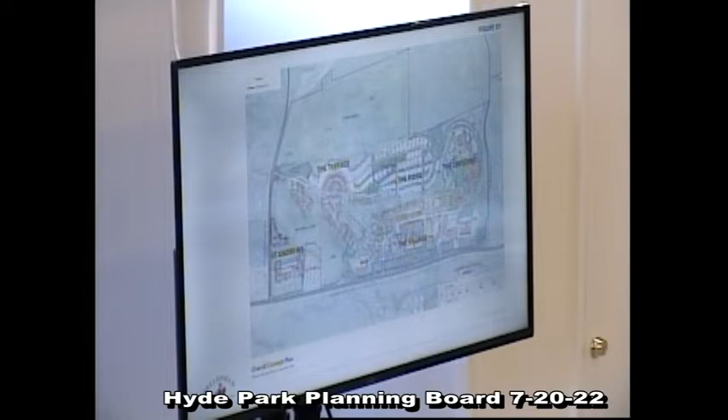So Chris, go to the next one. I wanted to remind the board, again, this is the overall concept plan, which was approved last December. We're all familiar with that, worked very hard on getting that worked out with our team of consultants. This was prepared by Hart Howerton. Of course, the village is where our phase is, that's where we're focused.

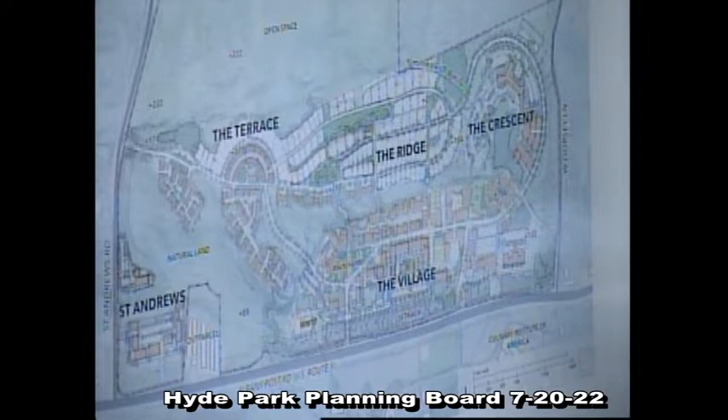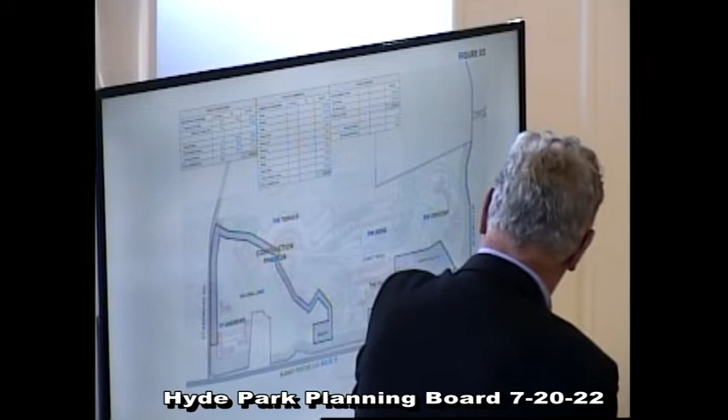All right, this is the phase. This was phase 2 that we presented last December, but the big picture here is the sewer going up, which is what we're doing, and this comes out to here, down and around, so pretty similar. The idea is that we are developing Main Street - we're going for it, so we're going to take it from here all the way through, come up and then down, link it over here, and then of course with the main entrance going here.

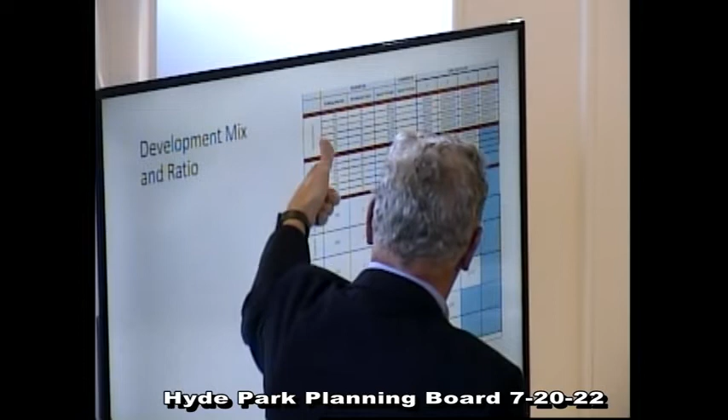So what I wanted to show is this development mix ratio, which we've submitted, it's part of the package. This is a pretty clean way of showing the way we identified the uses and the buildings were by number. So we have 1 through 1800, and then we identified whether they're residential or commercial and assigned the units, the square footage, so we can take that all the way down. 18 buildings, 344 units, and then the square footage for the residential, commercial. We're adding in the hotel into this phase, the 106, because it's by itself, so we rolled that in. And then we can compute the ratio, which is at 62.8 and 37.2 residential.

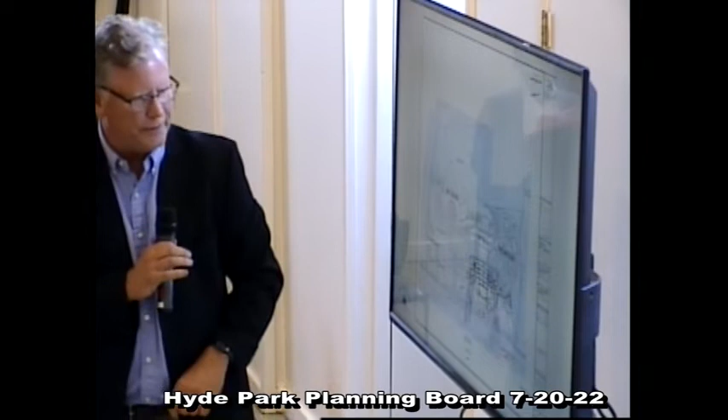So what this does is show phase 2 as we propose it over the concept master plan. The next one shows it zoomed in, so you can see that this is a civil drawing in CAD, tied to radiuses and grades over the concept plan that was done freehand. So this is in CAD, but it's pretty close to where we had designed Main Street to be.

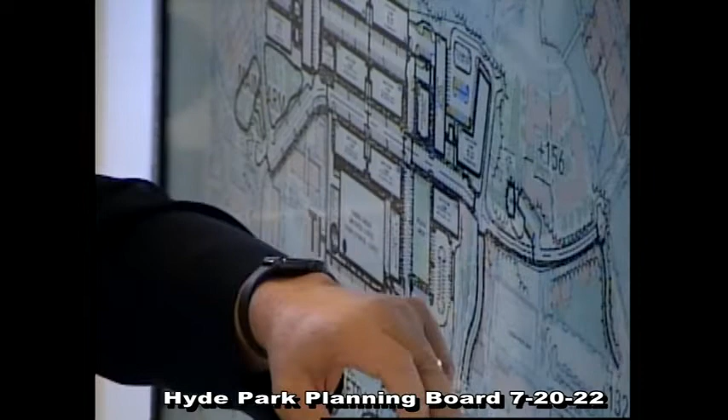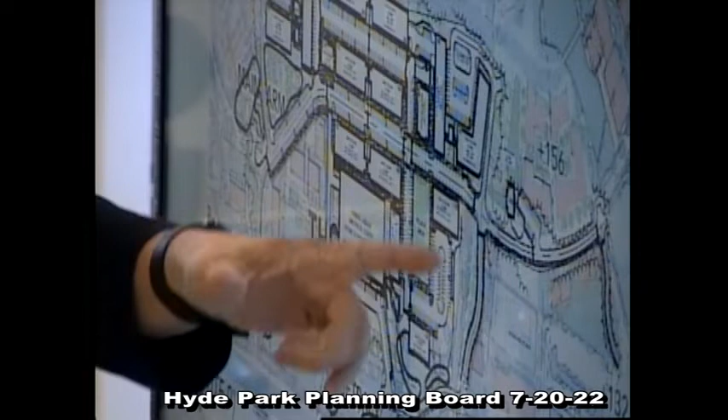It is pretty close. Where you see roads move around, that's mainly because of grading reasons. For example, this here is moved that way because we do not want to disturb the wetlands, so we gave it a buffer, sloped up, which defined where the road edge was.

So for Main Street buildings, there is a difference in this road design compared to what was originally approved on the ODA map, and I do show that in a couple of slides. The reason why, here we kept the parallel parking, here we went angled, and angled here. We needed to do that because we needed to get to the parking demand.

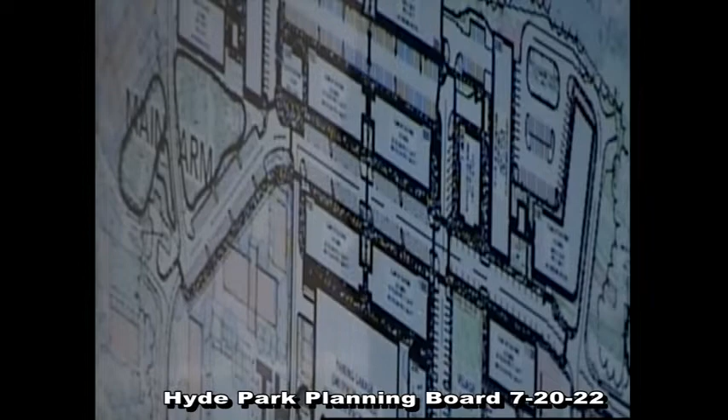Part of your set includes the parking allocation, and we color-coded everything so you could see that we're not just fluffing this up, we really nailed it down. The parking requirement is based on spaces per unit, not only for residential at 1.5, but on the commercial side we were using 5 per 1,000. Whatever we couldn't fit in this area ended up in the parking garage.

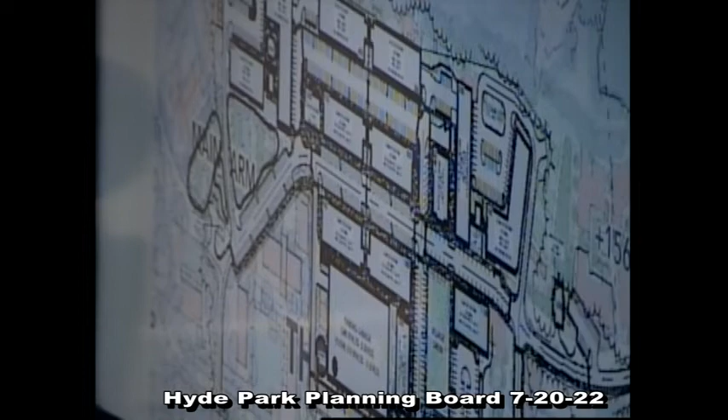You also added a little bit of parking on the outside, ground parking, surface parking, where you changed the road that would go up to the parking garage as well. Correct. So this road follows that utility corridor. It goes over those wetlands, and you're right, when you look at the ODA, the road's not there. So this was an add.

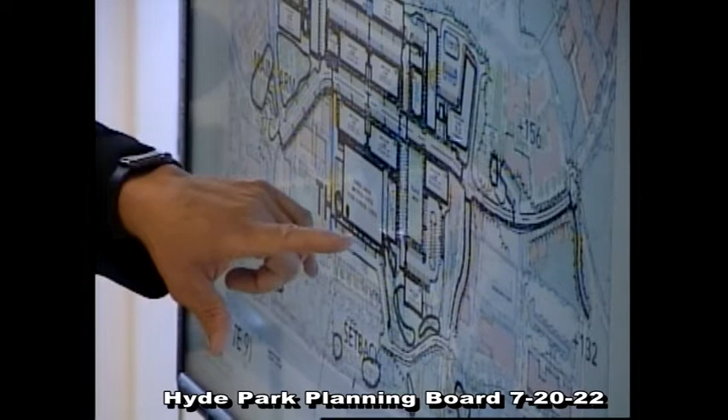And I did go back and look at the concept plan. We tried to leave a 20-foot buffer between the garage, so we're going to plant that pretty heavily. Larry, what are those circles in the setback?

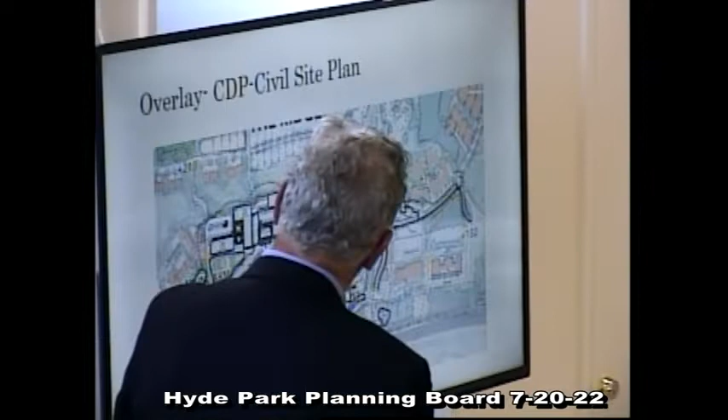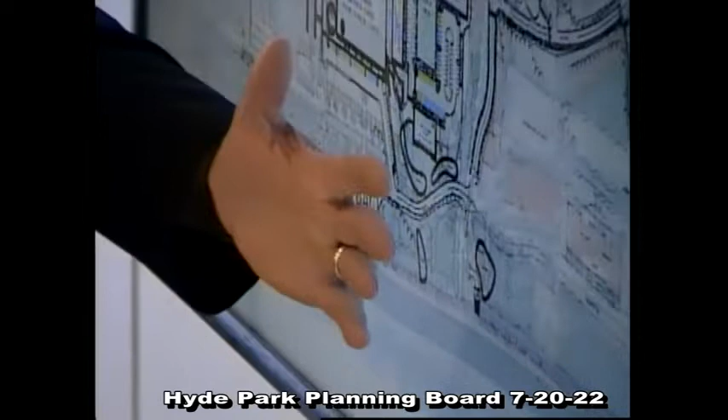These are identifying areas for stormwater management. It's not worked out yet, but it's a natural low depression. We went ahead with Annie and marked all what we felt were significant trees along that entire setback, so we'll work with them accordingly. But yeah, that's what these are.

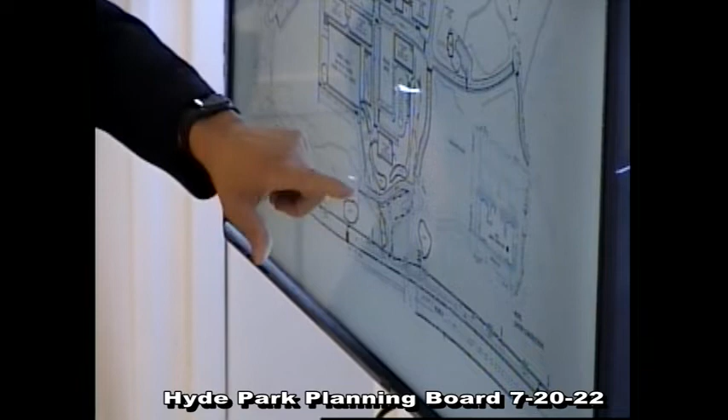This is the phase 2 by itself without any background. So you can see the road here coming up to the parking deck. What's not here is this connection coming down and looping. Obviously, you can't do it because of the wetland there.

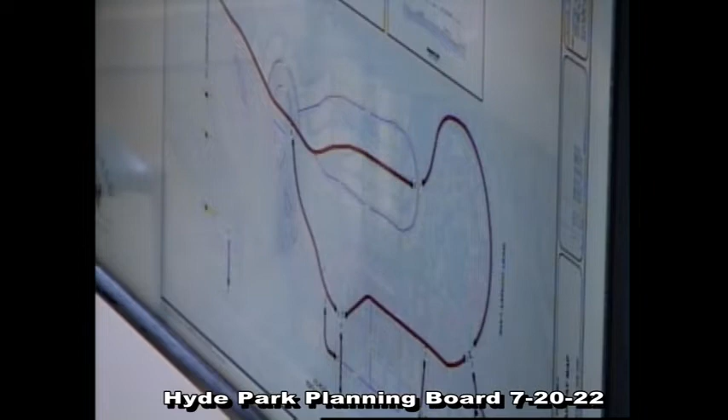Here's the ODA overall map, and it does not show that connection, so that is a difference. It also does, and rightfully Tad brought it up, this is number 6. So when you look at number 6, you see the profile of the road, and we'll respond on how it's different.

Mainly, it's different for 2 reasons. One, we went to angle parking, so we need a wider width. The other reason is the sidewalk along Main Street has to be a minimum of 5 feet. We made it 15. 15 feet is really a good width for retail tenants to have before you get to parking.

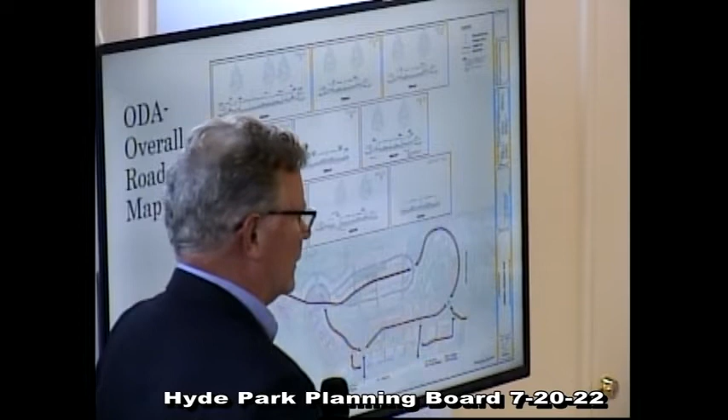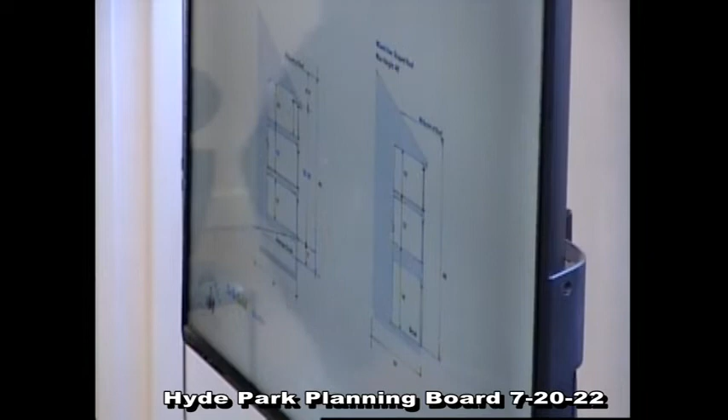Building heights, we are calculating now at every 10 feet, so that's quite a chore. We are going through that. Several of them are not going to meet this 46 feet. All the Main Street building heights are met or below 48 feet.

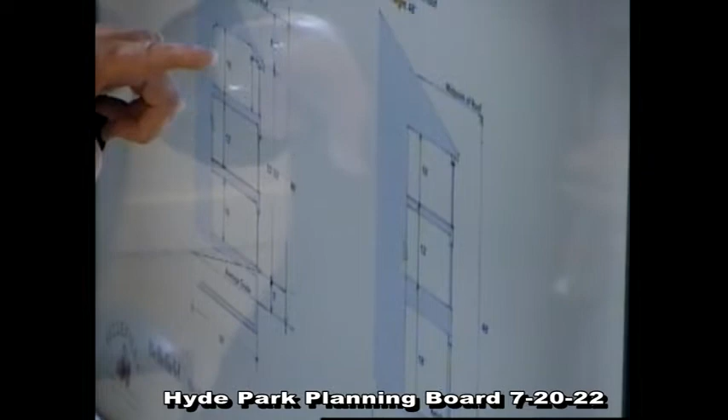But I was sitting down one day looking at this, and we were flying through this back in December, and I said wait a minute, these numbers don't add up to 46. Depending on, like this 10 feet here, what happened to this 2 feet here? This is a weird configuration. This really should go across here, that line should come up. So it's really a 48 or 49 foot number. But even with that, we're still going to be a little bit above that.

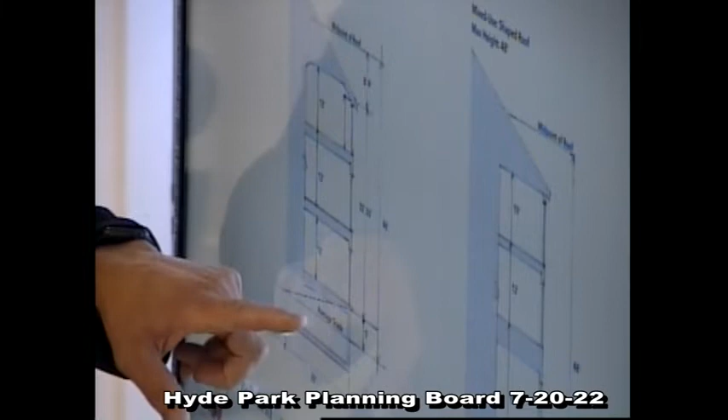What does not change, and I think there was some confusion, are the number of stories. I think I said 4 on there, but that first floor includes a garage, so it's a garage plus 3.

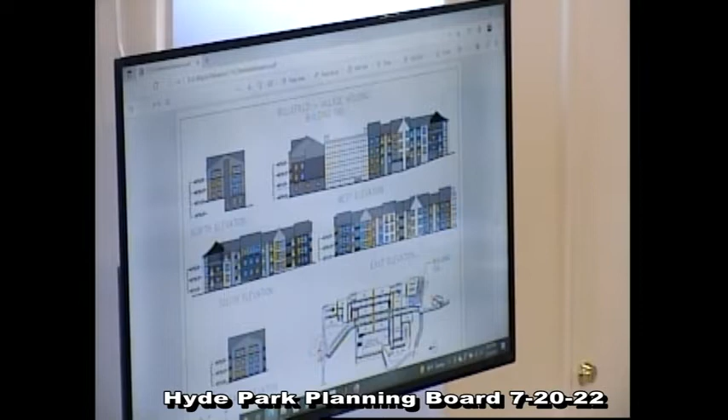So this is building 100, and what we did, you can key it in, you can see it here. As we go through, the buildings will be highlighted. This is the first building. It's all residential. It actually has a bend to it, so it goes around the road and keeps the integrity of the corner. You can see the architecture is very traditional in form, with massing, gable ends, and varied types of siding.

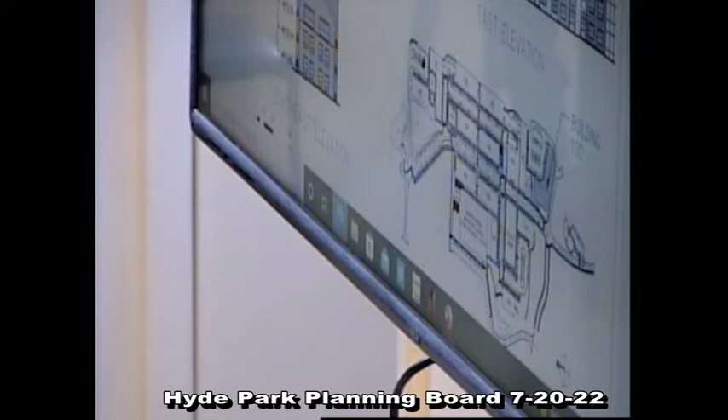We'll have, you can see here, this is the west elevation. This piece here is more modern, but that's a connector between 100 here and 200 there. So you'll see we've had a play with that, so you get a modern piece that keeps check with the traditional architecture itself.

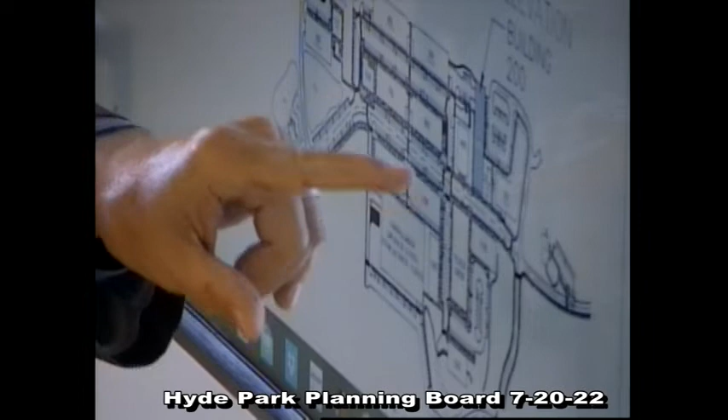200 is the sister building to 100, on the other side of the connector. This south elevation you can see is along this edge here. This is like a sliver building, sort of. You'll see the edge, which is here, and that's the west elevation. So 100 is over here, the connector is between, and this is the 200 building. This also has underground parking.

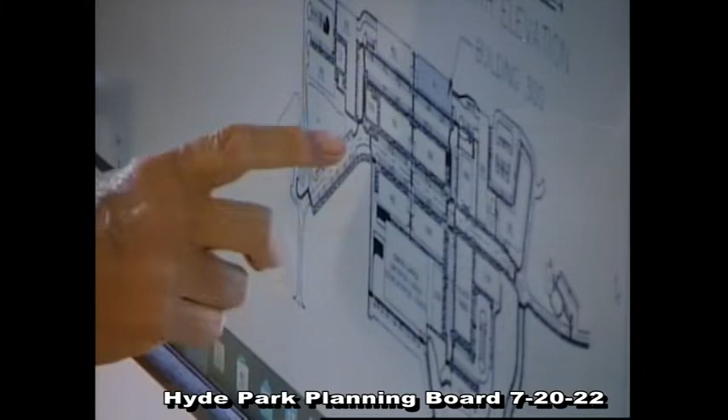So the 300 and 400 buildings, to orient everyone, these buildings 700, 800, 1000, and 900, this is Main Street. Buildings 3 and 4 are behind the Main Street buildings. These are residential buildings in character and totality. Again, you can see the flow of the architecture keeps on through. It has a gabled end, some really nice glass elements, a lot of glass.

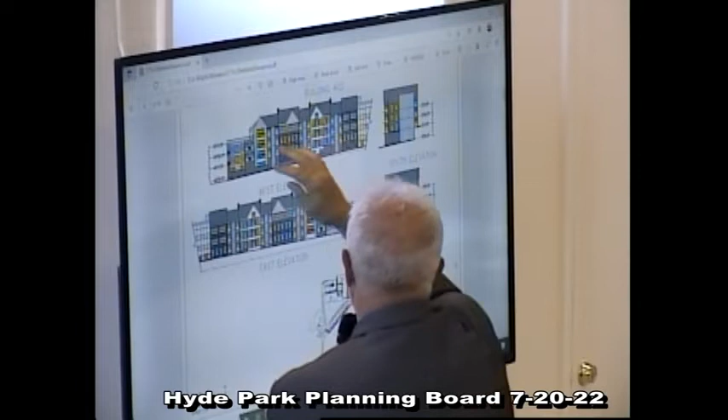As you see, the Main Street buildings will come up after. 400, this is the sister building to 300. You can see that 300 would be over here, this is 400, the west elevation up here, east elevation. This is more into the hill, this is more towards the river side, Route 9.

So this is 500, the next buildings will be 500 and 600. They are again residential in height, three stories. Again you can see the complementary architecture as you go through. The fabric of the architecture is varied on purpose. We didn't want something homogeneous, which wouldn't look good. We wanted something more interesting and organic, so the fabric is woven through.

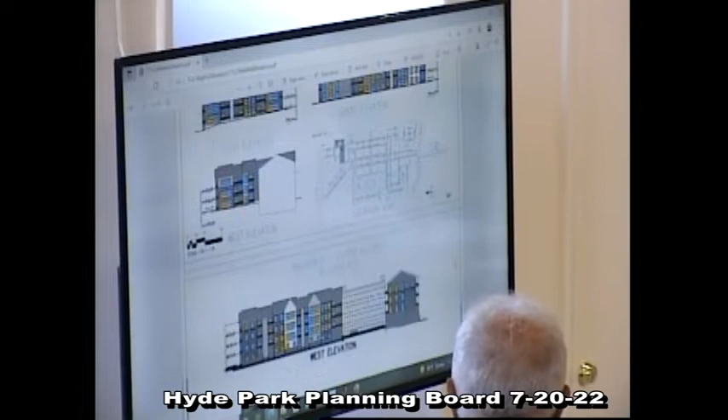Again, this is 600, the sister building to 500. Again, you can see how it all takes shape and comes together very well.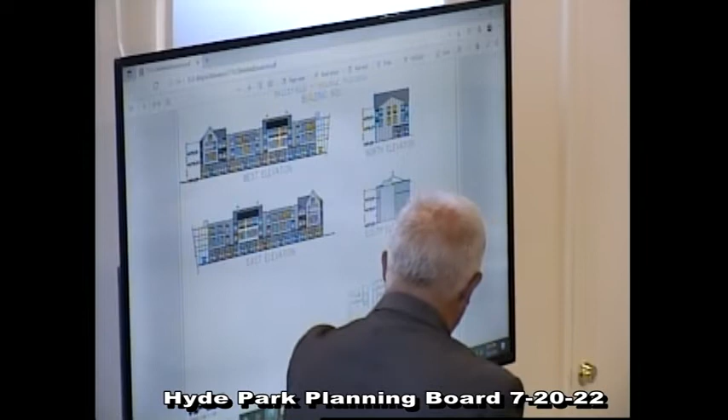So we go to 900 and 1,000, and you can see as you go along Main Street here, residential above the commercial. In this case, this would be the west side of the building. We're also going to have commercial, so you can walk through from Main Street, and then it goes to the parking garage itself. Building 1,000, same thing - residential over commercial, varied architecture, varied materials, very nice in context.

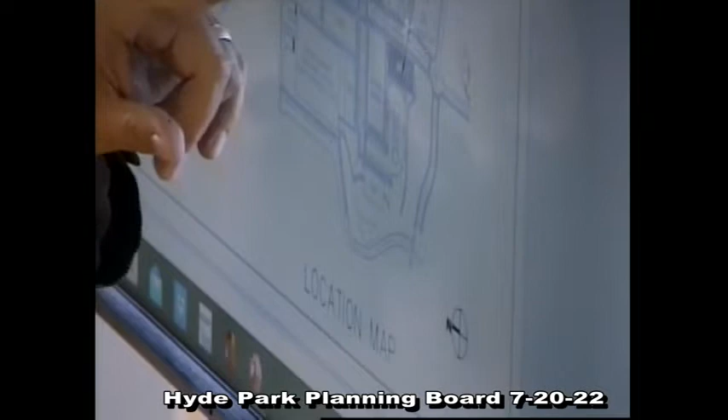Building 1100, a standalone building. So you have a village green here that will be shown in renderings as we go along. This is on the south side of the Main Street buildings, a smaller building, but all residential in form, with commercial on the first floor.

This is 1,200, again a standalone, smaller building behind, toward the riverside of the Main Street buildings. This is the City Winery building, and it's probably one of the closest buildings to Route 9 itself. It slopes down - it'll actually be a great place to hang out. City Winery is a known entity, a great tenant, great use for the building, and it starts to pick up some of the stonework along the western elevation, tying into the Hyde Park ideals. It has a barn-more feeling to it.

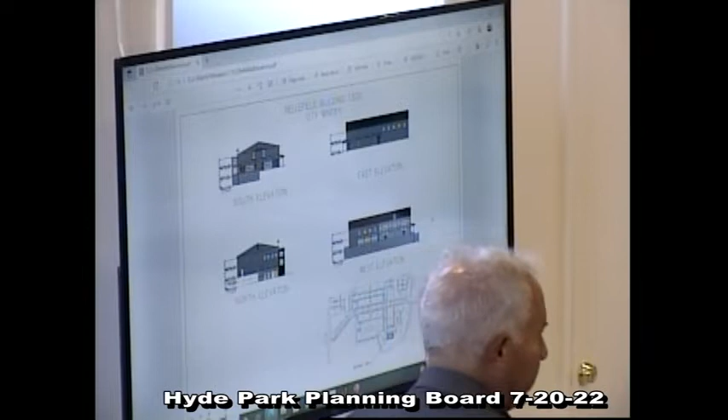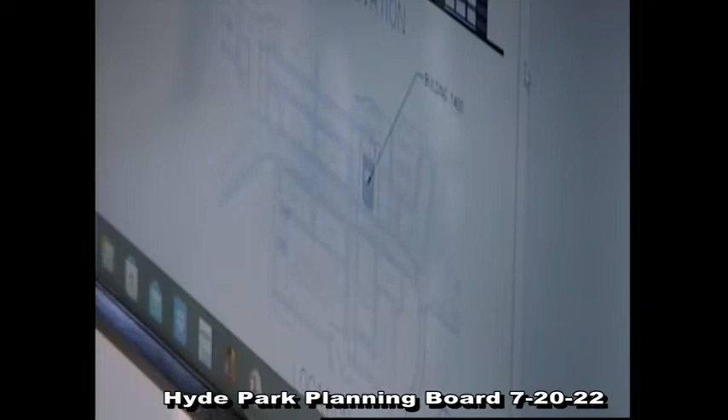This is an interesting building, right here. It'll have a rooftop pool overlooking the green, going down over this. It's really the focal point in terms of recreational operations for the site, from the logistics of the residential piece. This is the west elevation, so this will be the elevation along Main Street itself. That pool - you'll be able to look out over the green and down across the Hudson Valley. So it'll be a really great place to be.

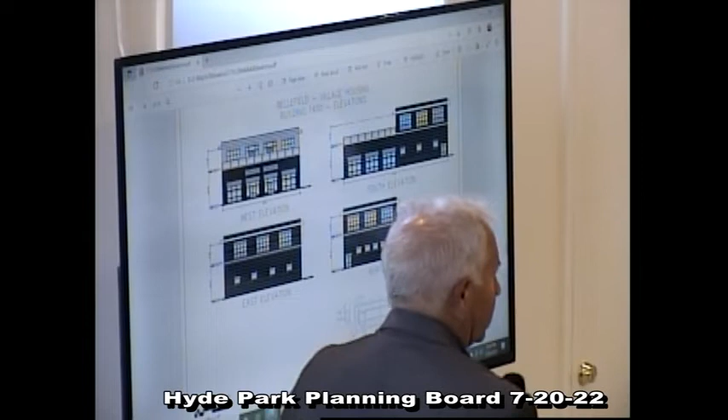You don't show the pool on the elevation of the building? Yeah, it's here - that's a glass wall. It's outside, but it's behind the glass wall. The glass wall is about 42 inches high, and then it's behind the glass wall, so you can't actually see the pool because it's within this - where it says signage, it's in here.

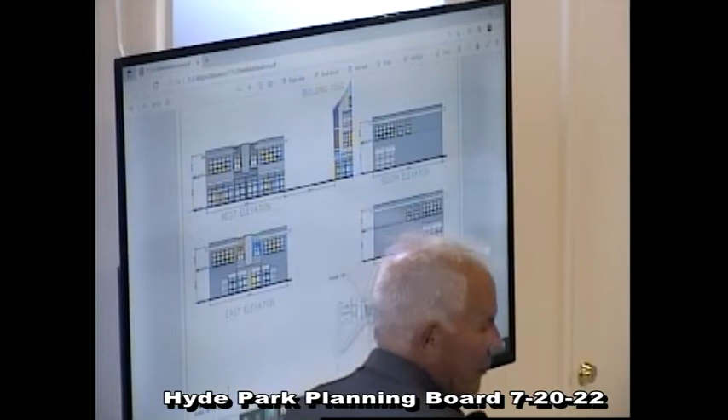So that building, the way it's shown, almost looks like a theater entrance or something - is there like a marquee on it? This one is commercial, so that's just a decorative element, not a marquee. Okay, and again, that's the 1500 building, which is on the northern side of Main Street.

This is the Inspiration Building. It's right here on the site plan, and this is where Tom Mulroy is going to be, along with Larry Boudreau, overseeing the project. It's right by the water tower, and it'll be connected with the terrace.

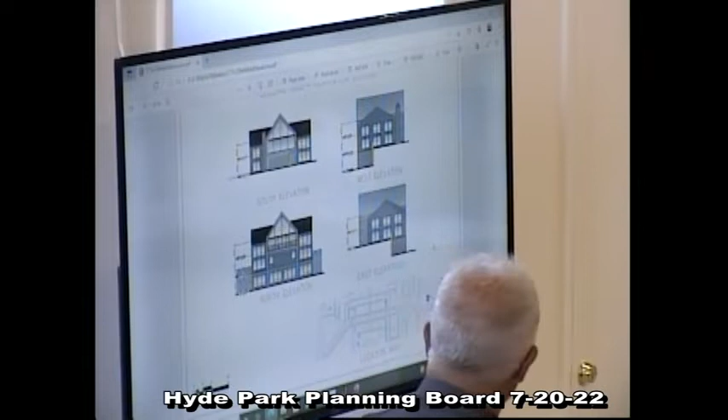This building is 1800, right down towards Route 9. The idea is to make this like a lot of glass. It's really a folly in terms of a building, a cool building to be there, but really the sake of it is to have an entrance point and a focal point for the whole project as you come up the main drive. It has a lot of glass and really cool elements in it, the tractor and... this is the sign barn.

This looks different than what you submitted as well. This has changed, and it's labeled as having a loft. It's a two-story building, and it's shown as storage on the chart that Larry referred to earlier, page 4. So does it have an actual use and a function?

Is it a sign or is it a storage barn? You have it labeled under use as storage, is what I'm asking. Well, the storage was for the tractor and the truck. In other words, will people be able to walk in and out of it? That's all I'm asking. Yeah, I mean, yes.

They're building up here, that's a 1700 building, and that is a real maintenance storage building. That's why I like the barn itself.

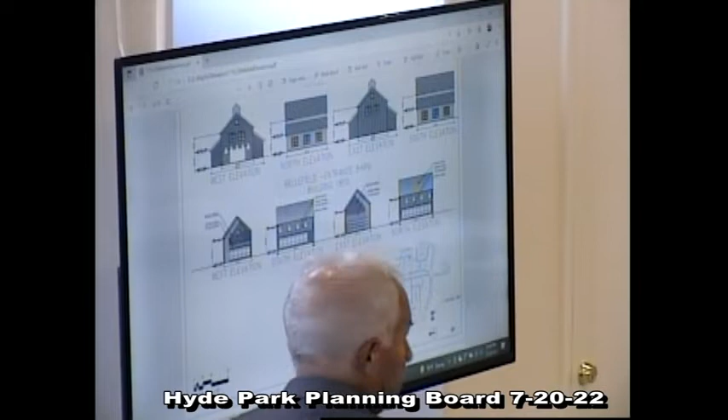So if the bottom one is glass, where's the sign going? That's what you would see coming up the drive itself. So the top one is called the farm barn? Correct. In your listings, you have a farm barn and a sign barn? Correct, the top one is the farm barn. Correct.

So essentially, the garage right now is 2 levels, for the most part one level. It actually has a low elevation. It has some green wall on it, as well as some wood panel, so it's supposed to really start to blend in with the landscape.

I should add that that does not comport with your design guidelines as adopted. The design guidelines say parking structures are supposed to be screened to reduce their visual presence. Appropriate ways to screen parking structures include ornamental building treatments, ornamental roof lines, gradually sloping earth berms, green vegetative facades and roofs, and that's just open, so you're going to see parking from there. So this does not comport with what's inside the code. Also, at parking structure roofs, heat island effects should be mitigated through the use of reflective paint, canopy structures, green roof, or solar PV arrays to block sunlight absorption.

That doesn't appear to be done here, so you're going to have to tell us what the mitigative measures are that you're doing to avoid that, because this is all proposed by your team. Yeah, so we'll take a look at it and come into more conformance. I think the idea with the green wall starts to do what the guidelines talk about. Green walls, that's already required in here as well. But you have to do something to the top, I think, to meet with this.

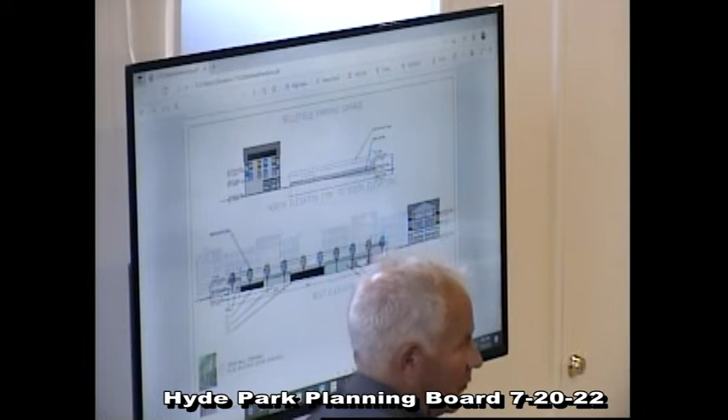I know this isn't for now, but what do you do with the parking in the meantime? Do you have to relocate everyone temporarily? It has to be managed, absolutely, but we did not want to give up on it, so we're meeting with them tomorrow about the logistics of it. Once all the businesses are operating, 200 places need to get somewhere else.

So you could do like half the garage closed at one time, and do the other half. Interesting.

But again, with the garage, it is a work in progress. We're meeting with them tomorrow to learn more about costs and how to make this thing happen.

What's interesting about this is that the third deck is below the finished floor of the adjoining buildings, so it all works. That's the proposed third deck.

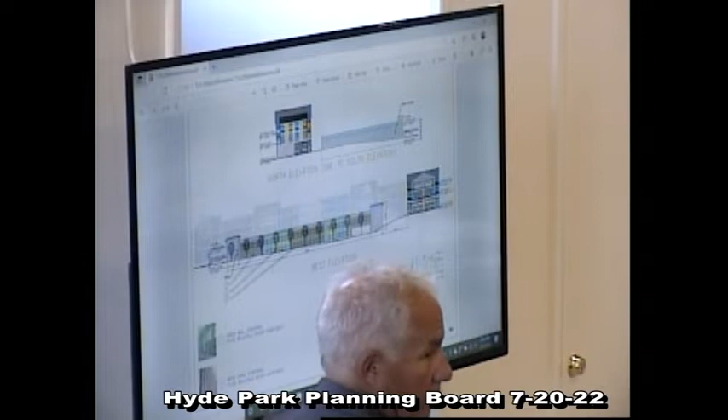So I think that's it. Chris, can you flip up the renderings? Again, the renderings are a work in progress, so you'll get the general feel for what's going on.

This is what we have. This is the corner building, as you remember. This is the first building we spoke about, with the enclosure between the two buildings and this clubhouse.

This actually has to be updated, as Ann talked about. That's why we couldn't figure out where it was. The pool's right here.

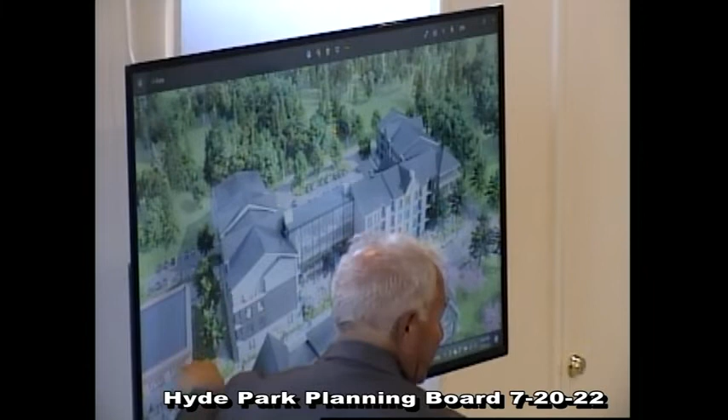I'm doing a lot of hand waving. Okay, there's my question.

These sort of plinths of something, I can show you here as well. It's this dark gray, sort of postmodern column. What is that, is it just decorative, and what's the material? Right now they are elements, but they could actually potentially be HVAC, something like that, for the units itself.

So we need some pop-outs for that, so we can get outside air. And the material isn't completely finalized right now because we have to value engineer everything, but we're looking to use a lot of hardy plank and hardy board itself.

We thought this might be based on what we just looked at from here. I think it'll be more panelized. It looks like board and batten, but it won't be true board and batten. Well, hardy plank does make a board, and what we've done, used it before, is it's got a plank behind and straps between, so it looks like board and batten, so less maintenance.

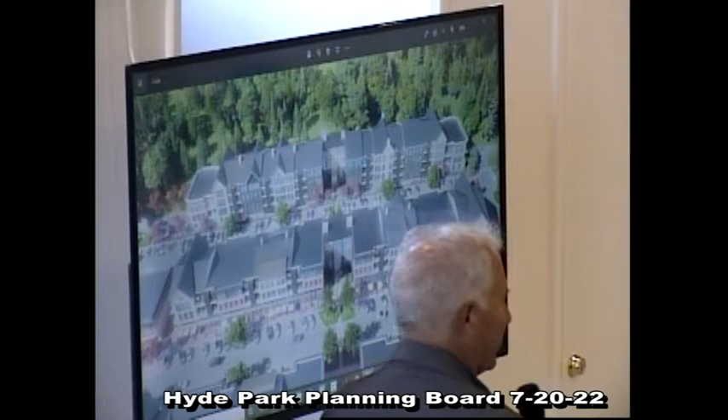It'll be more than that, because each of the end units on Main Street is where you're likely to have a restaurant or a coffee shop, so there'll be chairs and tables out there. It'll be pedestrian-friendly, active. The idea is to give an inset building—they're actually set back, so the pocket parks break up the mass of the building pretty well.

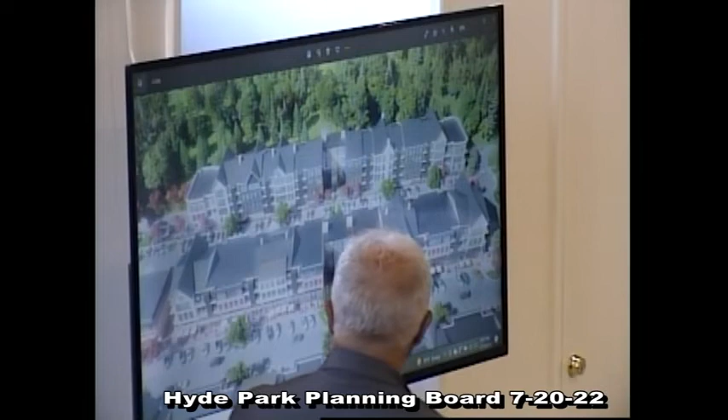This is just another rendering view of the same building. That pocket park is right down here, and it continues, as you can see, with the flanking buildings on either side of the pocket park itself.

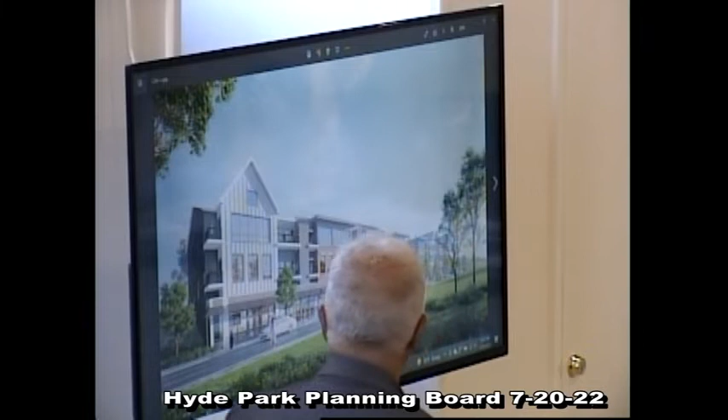This is, again, the northern side of the site—Main Street over here, coming around, and then going out down the parking area.

So what goes on in the glass section there? It's hard to see. It looks like it might be a gym or someone's living space. It's really a connector—it'll have vertical transportation, that sort of thing.

And an overall view of this first phase, the second phase actually, that you can see. It really starts to orient very well on itself. Route 9 is on this axis here.

What does the city winery building look like from the back, from Route 9? It has like a stone pop-out, but it looks like a barn. It's supposed to look like a barn with a stone pop-out, so it recalls back to the stone—more of an agrarian winery sort of idea.

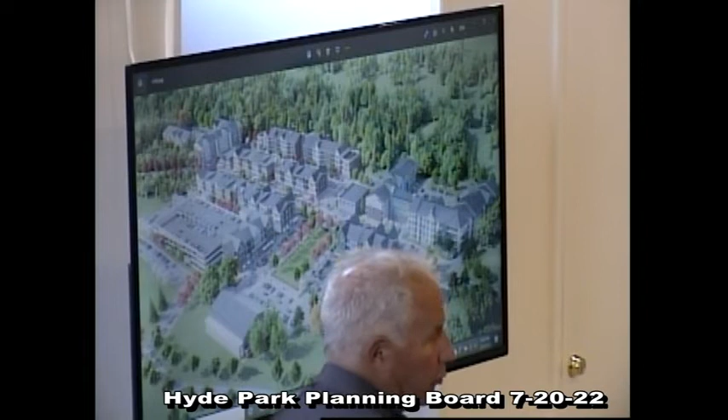Yeah. Yep, that's it. Thank you, Mr. McCormick. Thank you, Chairman.

First of all, I acknowledge that you're absolutely right to say that you should have the actual plans we're proposing. I discovered today that the design guidelines you have are not the most recent either—I never got the most recent copy. Okay, well that'll be in the packet that Larry and I are putting together. I would have sent them today, but I wanted to make sure it was the final version, the 27th piece that I have in Redwelds in my office.

So pardon our enthusiasm—I think we're torn between coming before you with a product finished enough for you to appreciate what we're trying to do, but also wanting to come here early enough so you have serious input into the design. Obviously this board and the town board were very active in working out the design concepts of the concept plan, and we don't want to appear presumptuous by not being here as early as possible. So we tried to get the best of both worlds, but I guess we missed a submission that we should have made this morning, maybe around 11:30.

This is a big, big project, and trying to wrap my head around it—I have a pretty good memory, but even I couldn't remember all this stuff. I was reading through it going, oh yeah.

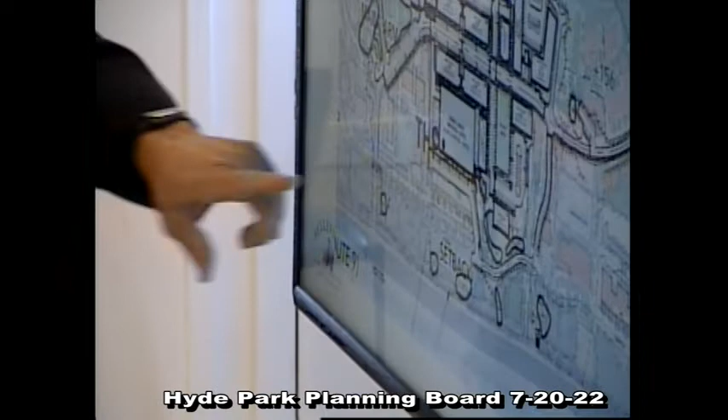No, this... Chris, can you have street parking in front of the parking garage? Yeah. On this, this is remaining undisturbed. We're gonna tie grade right here.

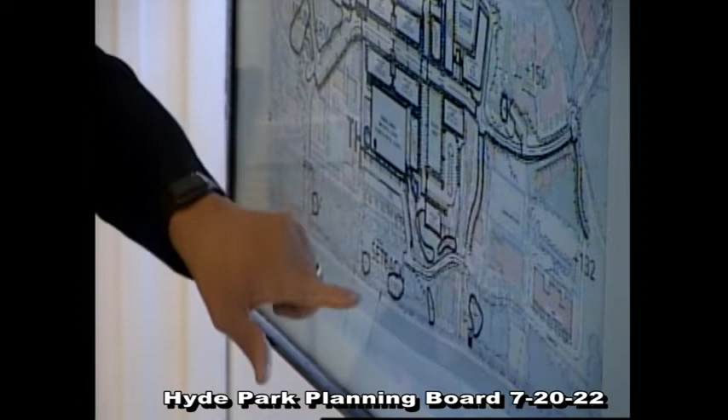So this all stays, all the trees that are there right now? Well, earlier you said you marked significant trees. I assume that meant you were going to take out the understory. We marked them along here. At some point we will, but we won't now. There's no need to do it now. Okay, just making sure you don't do it before you come in for your next phase.

Totally understand. I think it was at the site visit we had in October, the 20th maybe, when we were there in front of where the garage was going to be, that planning board members realized to protect from noise from Route 9, and any views, the board preferred leaving the setback area naturally landscaped. The understanding was that only diseased trees and things like that would be cleaned out, as opposed to agricultural or horticultural clearing.

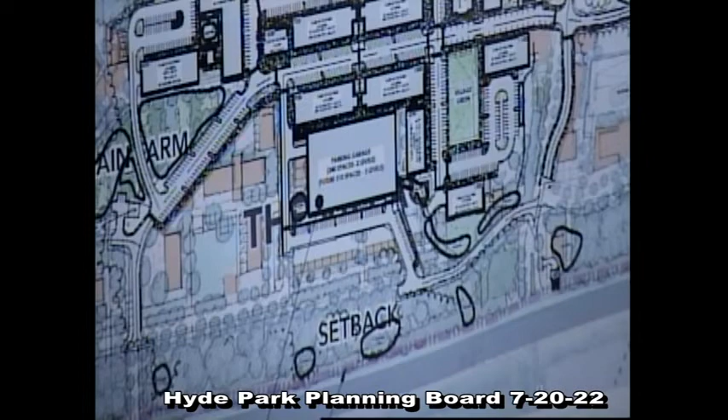We have the stormwater maintenance measures that were originally proposed there as well. That will involve removal of some vegetation. We will work with the board so that everybody's comfortable. We don't want people driving on Route 9 looking up at a parking lot.

Totally get it. So here's what I'll show you - another site visit coming on this. In the digital rendering, which may not be updated, you have green lawn, then surface parking right in front, no hiding it. I'm just looking at your materials to comment on it, just foreseeing future phases, well-mowed green lawn. We should be clearer. Okay, so I think probably the big picture comment I have is about the concept plan itself.

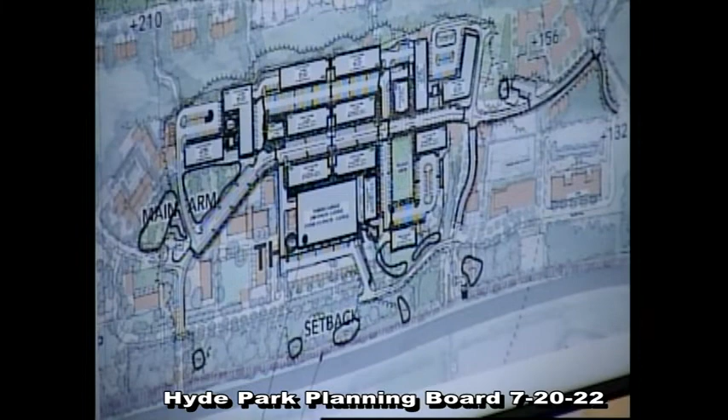The original concept plan, the one Howerton put together, looked organic. That organic sense came from my perspective of having a series of smaller buildings. For instance, if we look at that collection of residential right when you come in on the east side of the north-south axis, all the way to the south, if you look at that concept, it was 4 buildings with landscaping and sidewalks around it. Now it's 1 building that's all attached.

That pattern of building development continues throughout this phase. My recollection of the guidelines was that there were going to be limits on the length of the buildings, because you wanted to have this breakup, this sense of something having evolved and being organic. The connectors are lengthening the appearance of the building - even though they're shown on a rendering as clear and not opaque, the reality is it's a building and it will read opaque when built. The linearness of it doesn't look like it evolved.

There's a symmetry to some of the design, so I like the mix of materials and how it changes up. But if you look at one of the buildings along Main Street, each of the components are actually identical - there's only one portion of the buildings where one is a gable and one is not, so they're looking pretty similar. The material mix is good, but if you read the whole building, it's looking very symmetrical. Looking at something symmetrical and very long and reading linear, I feel we're missing a little bit of that organic feel that this was going to be a hamlet.

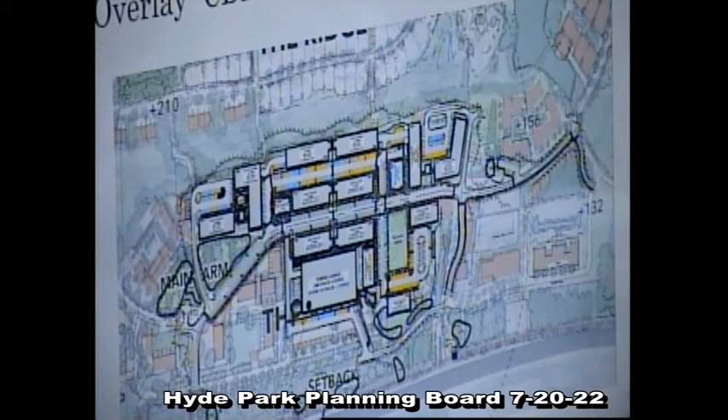Thank you. Mr. Sotero, comments?

Well, we all know that the engineering is the most important aspect of this project, so I'll try to temper my enthusiasm at the moment. No, but this is a really cool plan. I've been around the town a long time, and this is really, really cool. So I hope I get to see a lot of it built. I don't really have any comments at this point.

The only thing that I would say is, Larry, as your team is developing some grading and some drainage, let's have some meetings ahead of time so that we can work together. So that you're not fully designing something and then we come up with, oh geez, what about this? Let's work together on that.

And Tad's going to be involved in that because stormwater is very near and dear to her heart. She came up with good suggestions, and she had a good point about the grading. I know that the plans look like it's all a flat site, and I'm sure that's stuff you're looking at.

And the other thing we have to do is manage the cut and fill balance. There's cut, fill, balance, and rock - all these things come into play.

The only other thing I'll add, just having gone around and seeing a lot of these similar developments being built, is one thing that I don't like - when some of the buildings are built, the construction staging areas for the next building are right there. It seems like there's got to be a way to keep construction staging areas more away from where you're finishing up buildings and where people are going to occupy. I'm not going to mention anyone in particular, but there's stuff all over the place, and you can't clean some of it up.

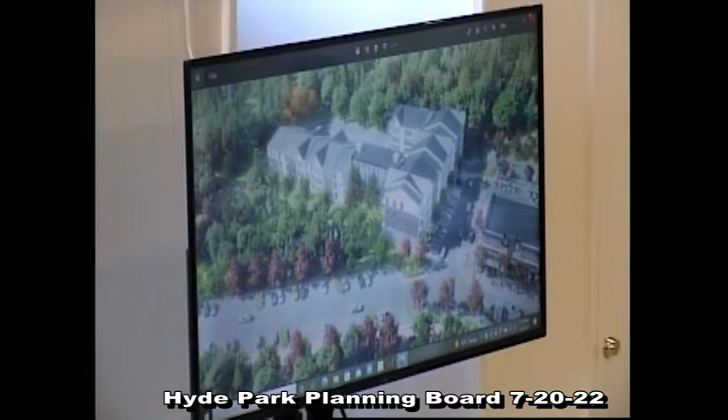So anyway, I'm like, if you got rid of that rose color, or just used it less, or, you know, just made it like, oh, look, there's one building that has some rose on it.

See how it's very symmetrical. That makes it look less organic, as though it was built all at one time rather than organically over a few years, or over a decade or so.

Just by mixing materials and throwing in something that there's only one of, like on Main Street there's one brick facade. That would go far.

This is the rendering - when I was saying it looks symmetrical, the primary difference is the two white units, one has a gable front and one doesn't. But other than that, it's not reading as if it's articulated somehow.

So I think what needs to happen is it needs to be reading as more articulated - it's very even and symmetrical, right? I think that's something that can be dealt with, just a little bit more work on that.

But I can really appreciate - I think if you're an architect, you have to look at the symmetry and you have to look at the balance, and to be asked to be a little unbalanced could be quite difficult.

I'm not saying anything about you.